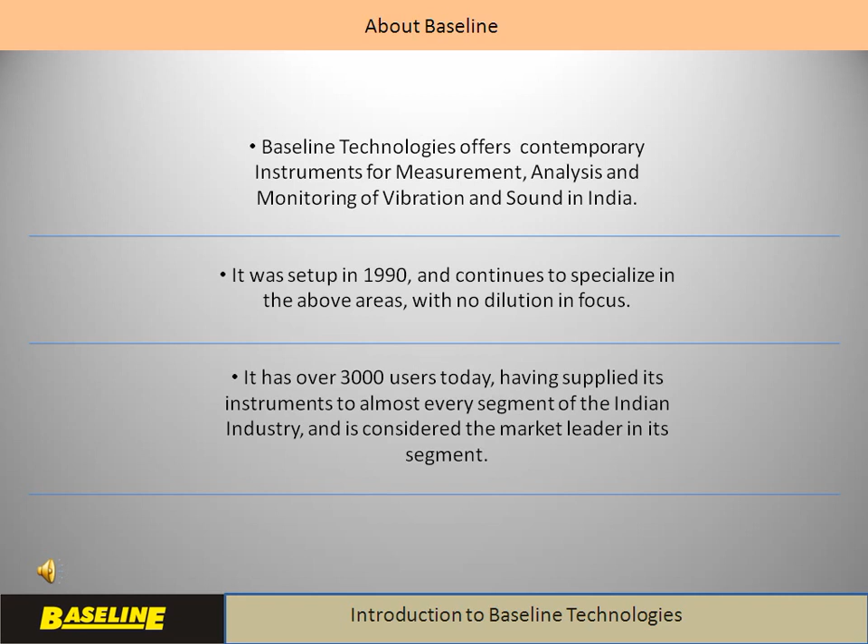Baseline Technologies has over 3,000 users today. It has supplied its instruments to almost every segment of the Indian industry, including the nuclear power sector, railways, and almost every leading engineering industry in the private sector. It is considered the market leader in its segment in India. These instruments have achieved industry leader status over the years due to their quality, dependability, ease of use, and continued application support offered by Baseline.

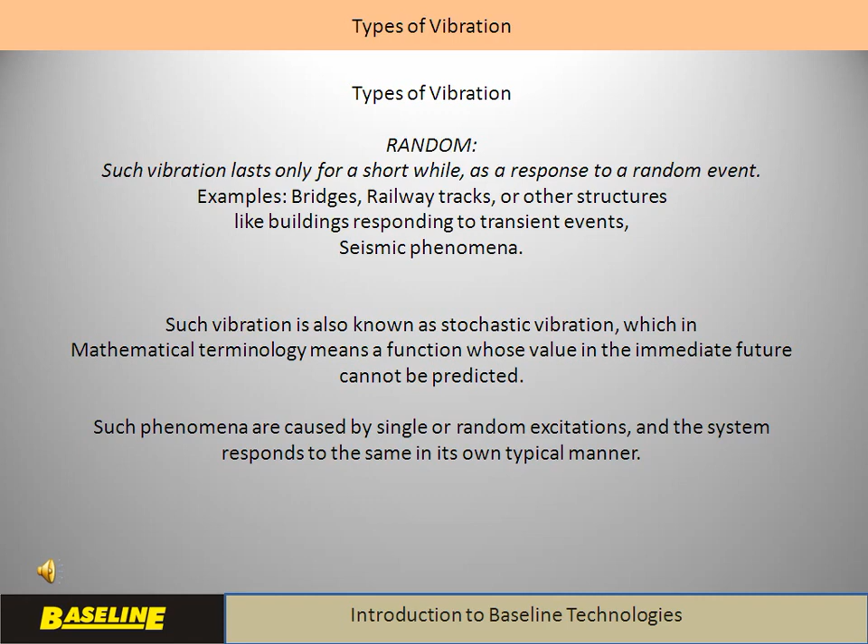Vibration is simply the to and fro movement of a body around its rest position. Vibration can be categorized into two major types: random and periodic. Random vibration lasts only for a short while as a response to a random event, for example bridges, railway tracks, and other structures like buildings responding to transient events and seismic phenomena. Here are some examples of random vibration, which is also sometimes referred to as stochastic vibration.

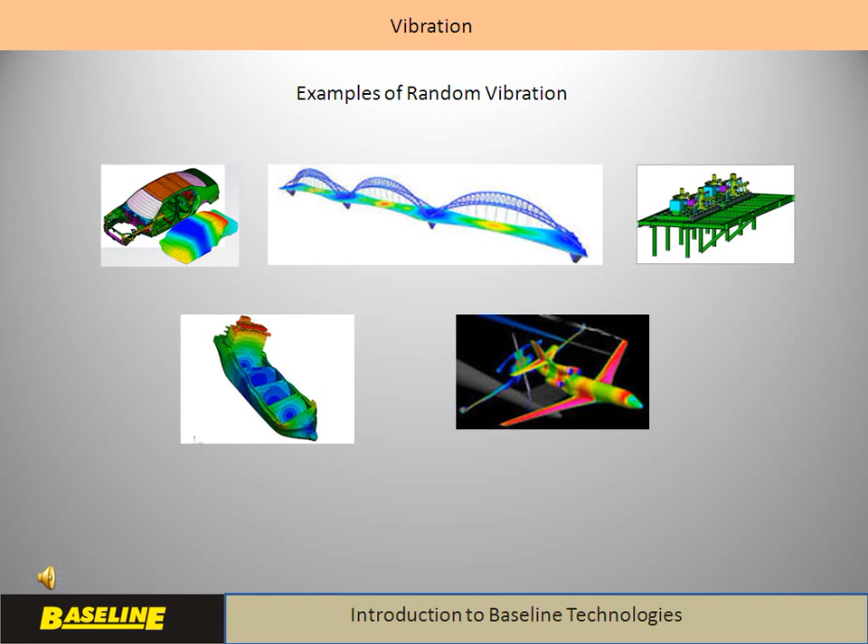Periodic vibration is a steady movement of the body around its mean position. It is a repetitive, predictable phenomenon and has a specific period over which it repeats itself. It is always a response to an alternating force, for example machinery vibrations and also structural vibrations caused by gensets or air conditioning plants, etc. Such vibration displays a periodic time function which follows well-defined mathematical rules, like a sine wave or the sum of many sine waves. It can thus be reasonably predicted. Thus, the concepts of frequency and its inverse, the time period, are associated with periodic vibrations.

Baseline offers equipment for assessment of the second type, that is, periodic vibration only. Here are some examples of machines which display periodic vibrations.

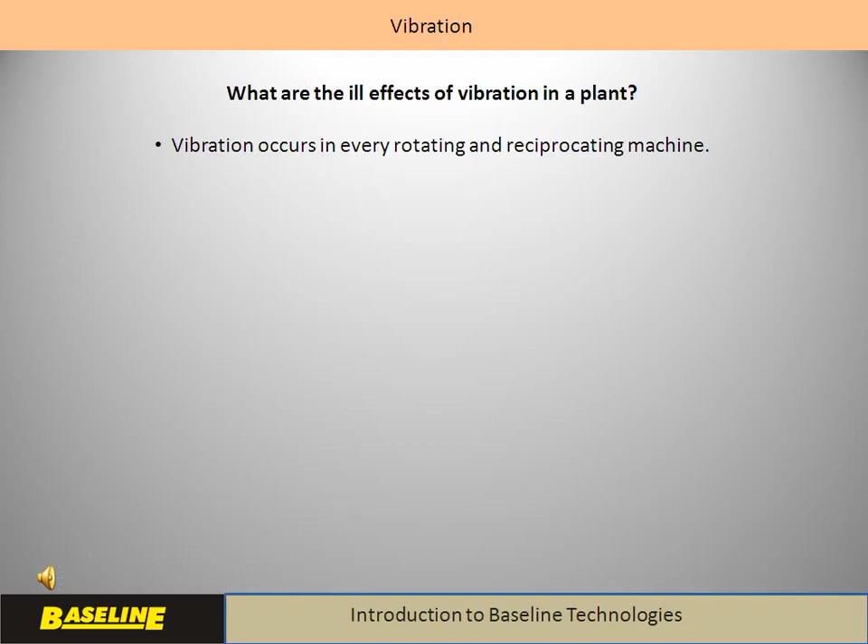Vibration occurs in every rotating or reciprocating machinery as a consequence of forces which are generated in such machines. These could be due to a variety of causes, such as rotor imbalance, misalignment, faulty bearings or gears, eddy currents, electromagnetic forces, etc. These forces act through the bearings to move the stationary parts of the machine.

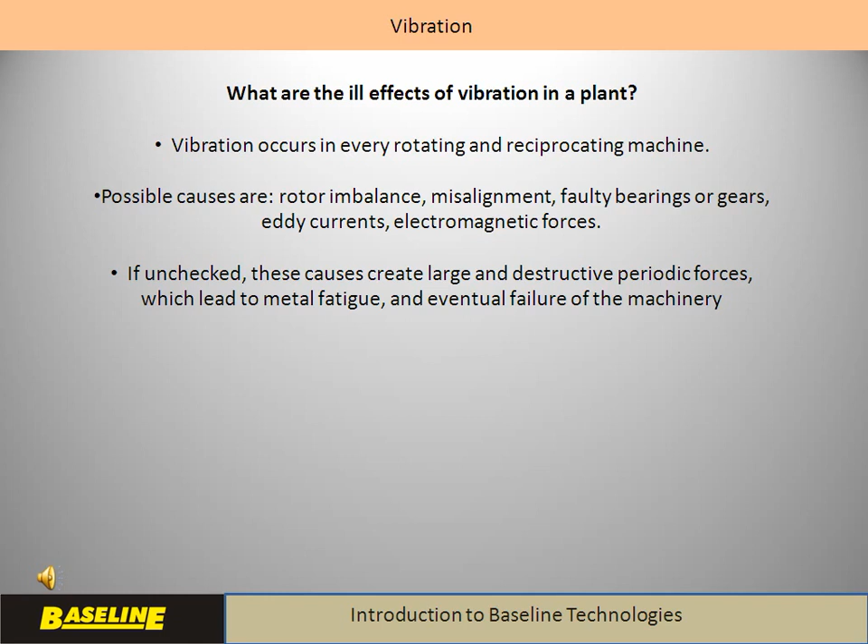If these forces are left unchecked, the following consequences are to be expected: metal fatigue leading to fracture, a lower bearing life, unexpected plant shutdowns, and energy wastage due to kinetic energy required for vibration. One of our customers confirmed having saved up to 18% of electric energy costs by implementing an effective plant-wide vibration control program. There is also operator fatigue and nuisance, which have occupational health consequences.

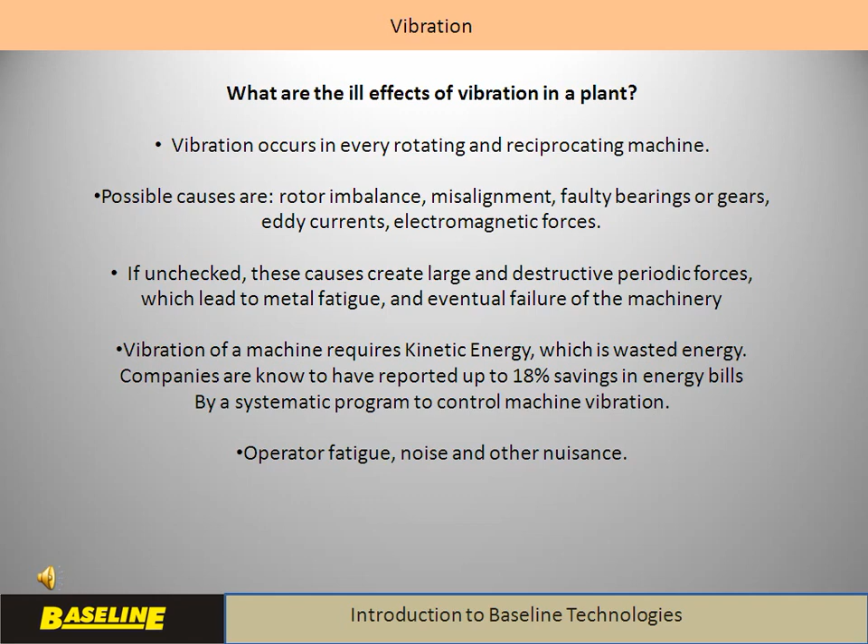Also, in some machines, it directly influences product quality, for example in grinding machines. Here is a real-life example: a cold rolling steel strip manufacturer was not able to achieve perfectly finished sheets. The problem was found to be the vibration on the grinding machine which was used to grind the rollers. This company managed to control the level of vibration on the roll grinding machine to extremely low levels. This resulted in an additional price of 25% due to higher quality classification based on the finish of the rolled sheets.

All vibration is the to and fro movement of a body around a mean or resting position. It can be measured in various ways. The amount of movement, or the magnitude, is known as displacement. It is the distance moved from one end to the other and is referred to as peak-to-peak displacement. The typical metric units of displacement are microns. Displacement emphasizes low-frequency vibrations; it used to be a popular method of measurement some 50 years ago. However, it does not convey the complete picture, since the energy of vibration is not only how much movement there is, but also how fast it is moving.

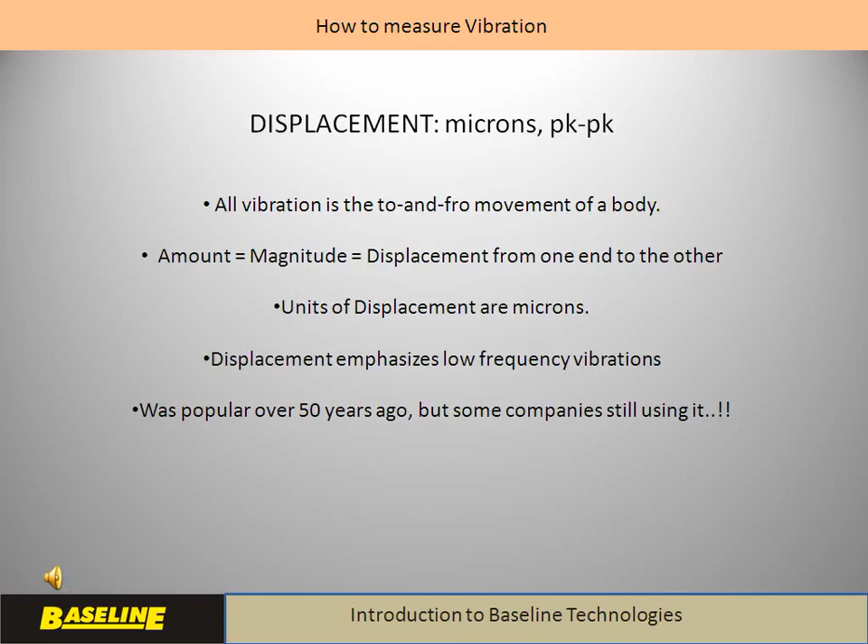The rate of change of displacement is velocity. It is the first differential of displacement with time. Therefore, velocity is the most commonly measured parameter as per modern standards. Velocity is the best representative of the energy of vibration, as it factors in both displacement and frequency. The metric units of velocity are millimeters per second. Velocity places even emphasis on low and high frequencies of vibration.

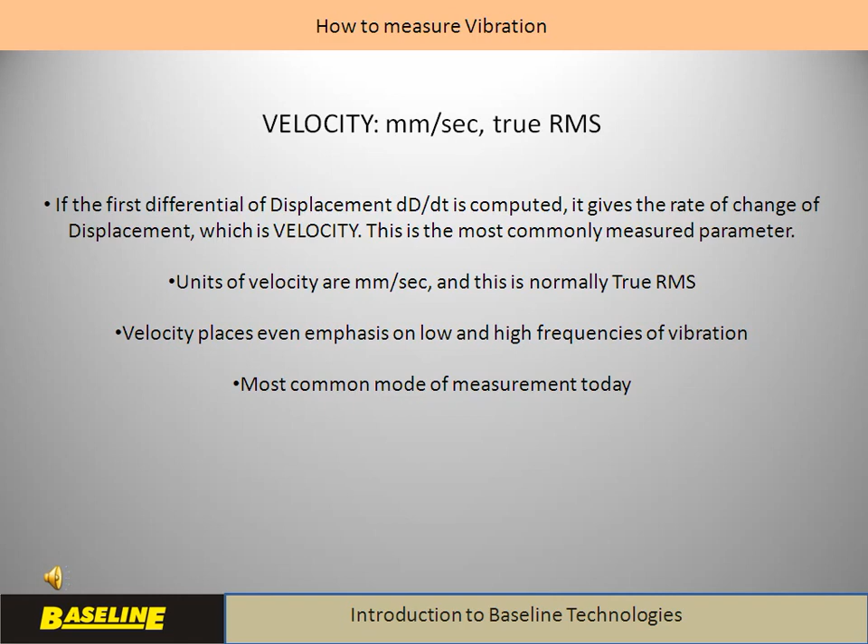The rate of change of velocity is acceleration. This is the second differential of displacement over time. The metric units of acceleration are meters per second squared. Sometimes this is also expressed in terms of the gravitational constant g, which is equal to 9.8 meters per second squared.

Acceleration emphasizes high frequencies and de-emphasizes low frequencies.

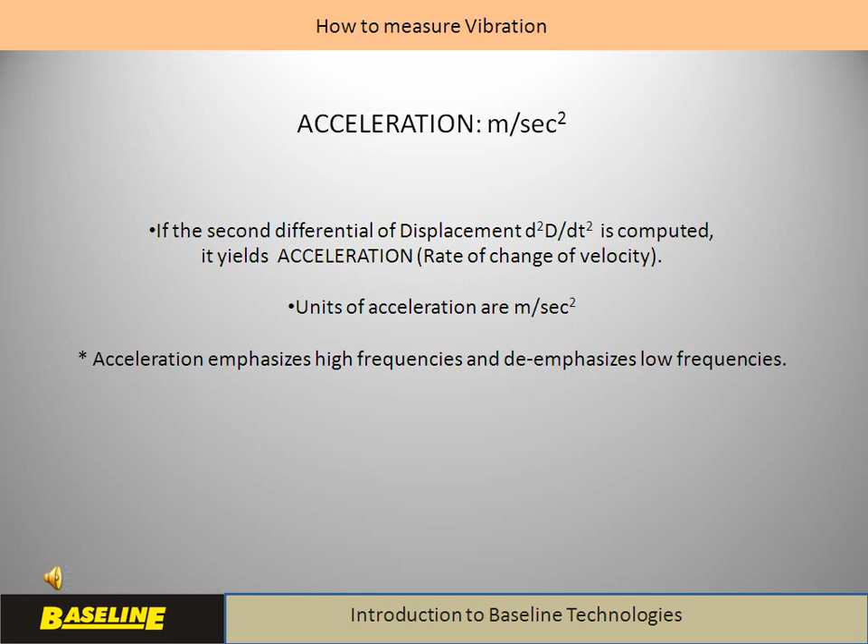Unless specific standards for a specific industry apply, the guidelines given in IS 11724 are a good guide for assessment of vibration severity on rotating and reciprocating machinery, which runs between 600 and 12,000 RPM. The standard is identical to the globally employed standard ISO 2372. In essence, the standard specifies how and what to measure and also classifies various types of machines into different categories depending upon their size and foundations.

It then lays down relative quality grades depending upon the measurement of vibration velocity. It also emphasizes the use of true root mean square velocity as the preferred parameter for severity assessment, as this is the only parameter which represents energy in the vibration correctly.

However, it does not mandate any acceptability criteria and leaves that to the discretion of the user. This is where the experience of the maintenance manager comes in. It is essential to periodically track the vibration severity, as measured by velocity in millimeters per second true RMS, at specified points on the machine. This provides valuable insights into whether a quality level B is good, or C is acceptable, for a given machine.

There can be several causes for vibration in a machine, and each cause has its own specific frequency. Thus, causes of vibration are identified through the understanding of frequencies present in a machine.

Based upon our experience, we find that imbalance is the number one cause for vibrations in rotating machinery. Whereas in most cases imbalance can be controlled by simple field balancing techniques, there are some cases where balancing does not seem to work very effectively. Such cases often pose a challenge to engineers and may require the services of outside experts, and yet sometimes the solutions can be amazingly simple.

Amongst other common causes are misalignment, faulty couplings, and vane pass. In pumps and blowers, the fluid going through pressure variations around a vane is often a source of eddies. This vibration can only be controlled by good design.

Faulty bearings are often the source of high-frequency vibrations in rotating machinery. Electrical motors may also exhibit vibrations due to an imbalanced or saturating stator field, which creates a distorted rotating field. Such vibration normally occurs at the electrical frequency or its odd harmonics. If the motor is also mechanically imbalanced, then the phenomenon of beats at the slip frequency is often observed.

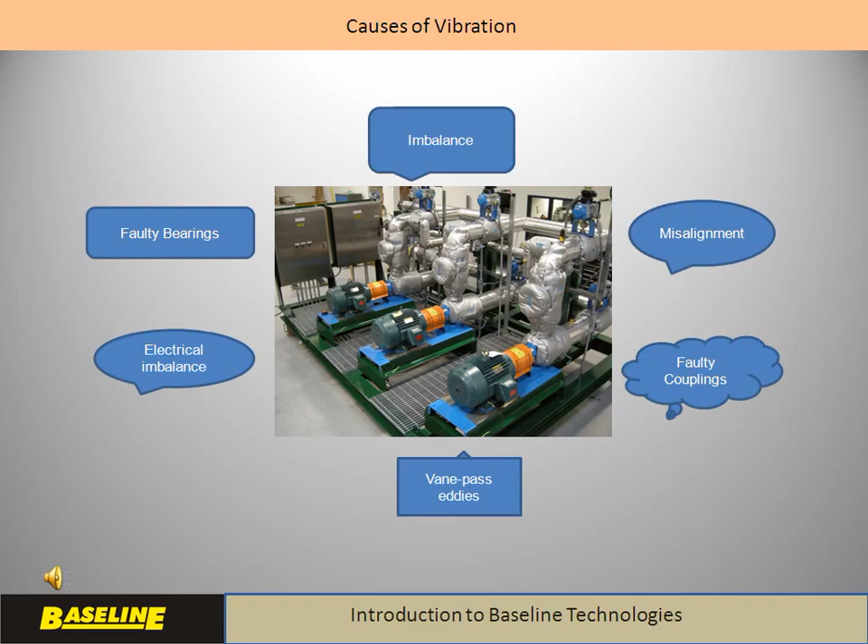A very simple form of monitoring vibration levels in machinery is to maintain a trend chart of vibration. In this chart, overall vibration velocity or bearing-related vibration levels are plotted over time, and the trend can help draw valuable conclusions regarding preventive maintenance.

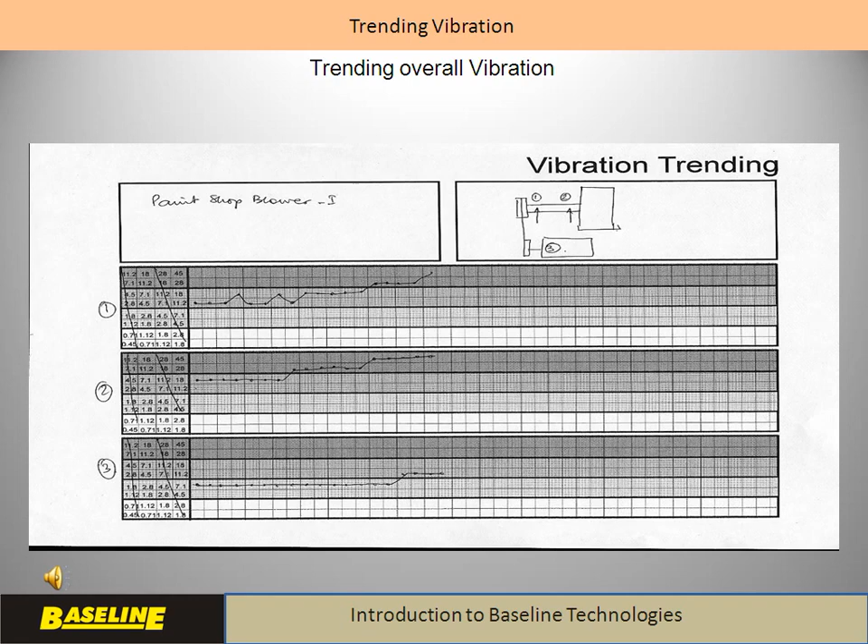In most cases, the technique of frequency analysis of vibration, also known as spectrum analysis, is essential to get to the root cause of the vibration. This technique is based on the fundamental concept that if there is a vibration at a certain frequency, its cause must also be at the same frequency. Thus, frequency information of the vibration is essential to fault finding.

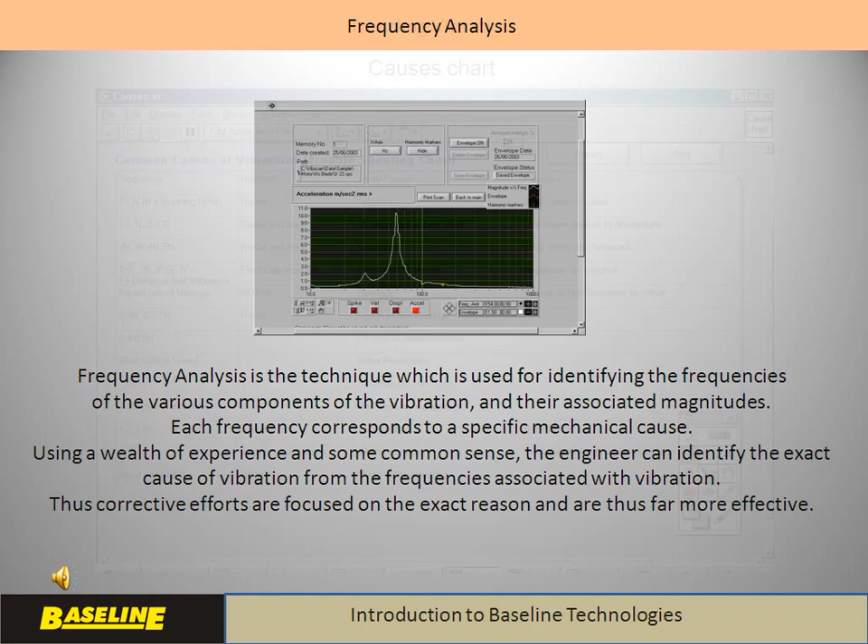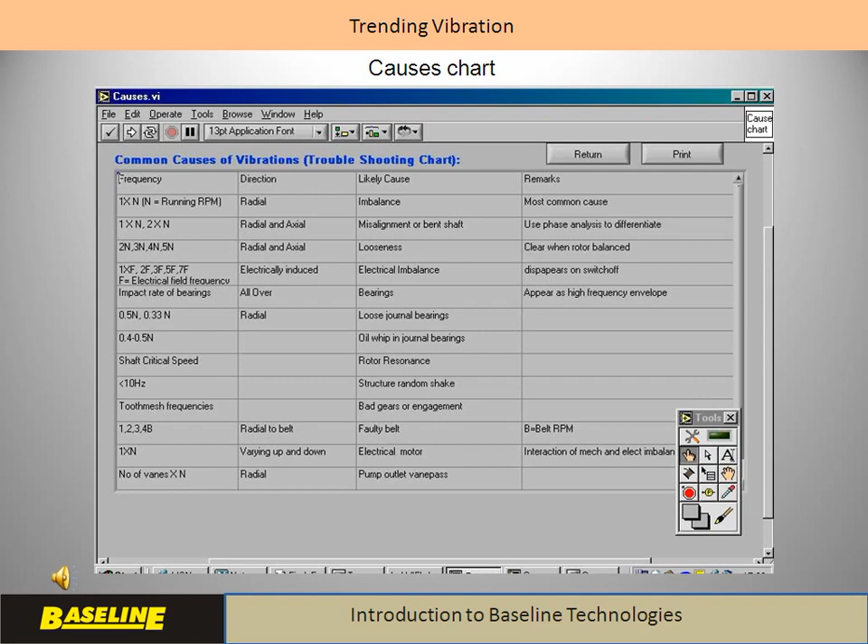A wealth of information exists on the internet and otherwise on interpreting the results of frequency analysis. Further, a system of periodic vibration assessment offers a powerful tool in the hands of a maintenance manager. A simple form of this is a systematic collection of vibration spectra at periodic intervals on specified points on critical machinery.

Techniques such as spectral enveloping and trending are invaluable for keeping a check on vibration and also in effectively preventing breakdowns in a plant.

Unbalance causes centrifugal forces in a machine. These forces create vibration at the rotational frequency. The principle of in situ balancing of rotors is based on this simple premise.

We measure the vibration as a vector, that is, amount and angle. The amount is proportional to the magnitude of unbalance, and the angle is proportional to its angular location on the rotor. A known unbalance is introduced and the system response is calibrated. The process then yields the correction mass to be added to counter the original unbalance.

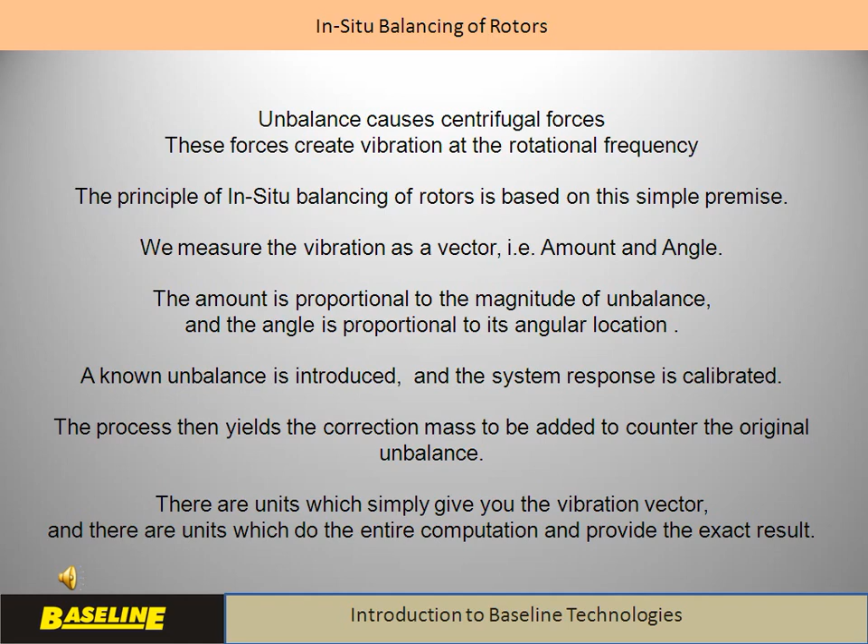Field balancing or in situ balancing is the process of balancing the rotor by running it in its native assembly with its own power. There are some field balancing instruments which simply give the vibration vector, and there are other instruments which do the entire computation and provide the exact result of where and how much mass is to be added to balance a rotor.

The benefits of vibration control and vibration-based condition monitoring are obvious, to say the least. Longer mechanical life of machines.

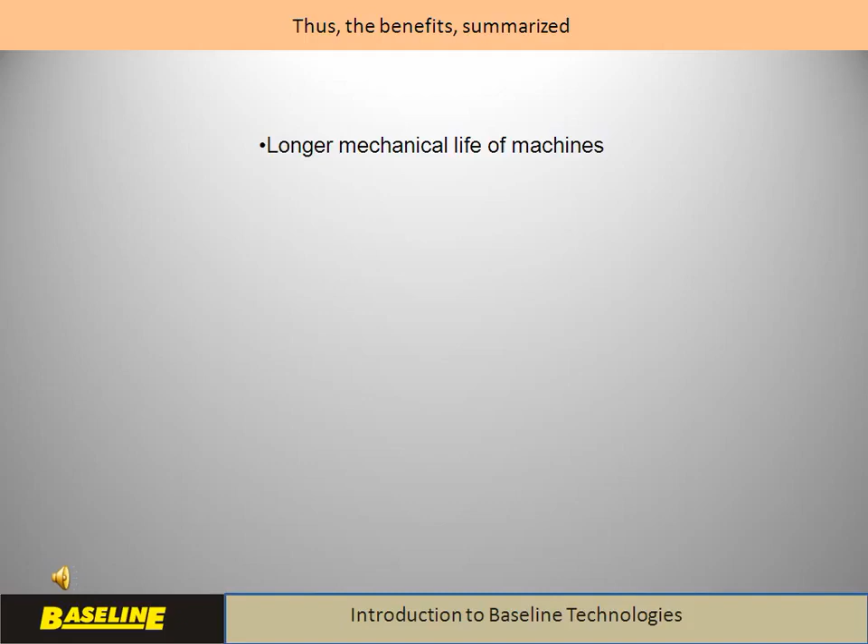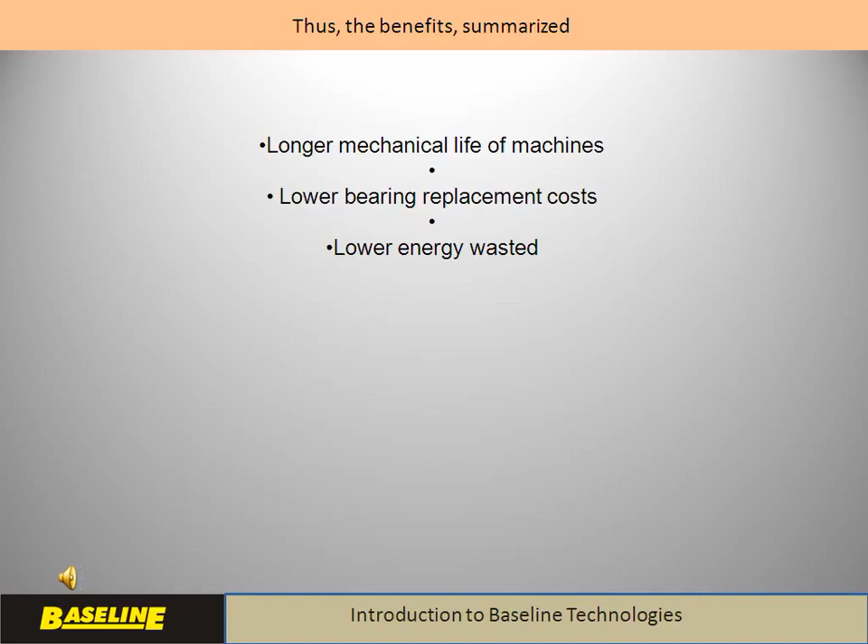Lower bearing replacement costs. Lower energy wasted. Better predictability of potential problems. Better quality of output. Quieter and less fatiguing environment. Reduction in unscheduled breakdowns.

The cost of instrumentation and development of in-house expertise is often recovered in one single breakdown prevented by these. Payoffs are often immediate. The long-term benefits are huge. This is the reason why most process plants find this to be an extremely rewarding investment.

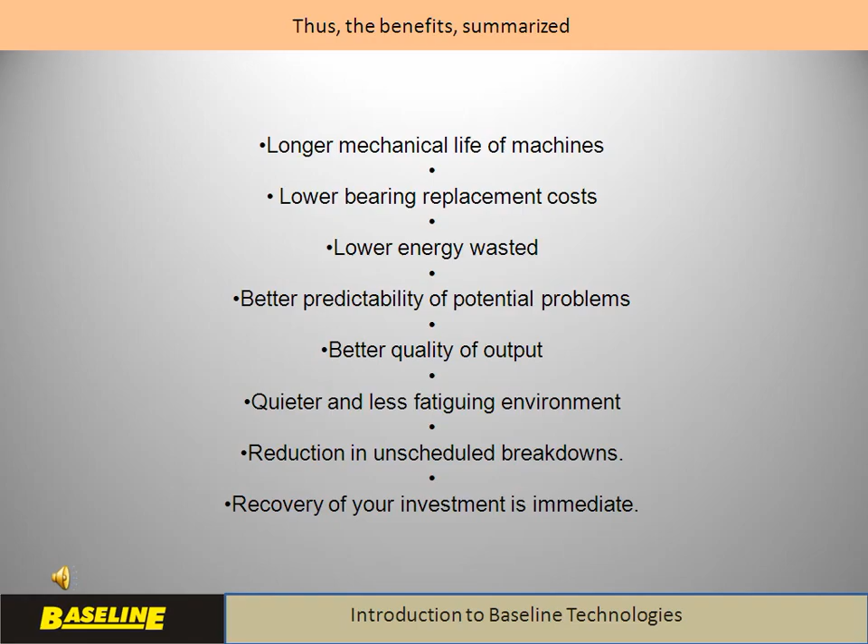Baseline offers instruments for measurement of vibration. There are two models of vibration meters, 2050 and 2040. Both are considered industry leaders in the segment and are in wide use across a range of industries.

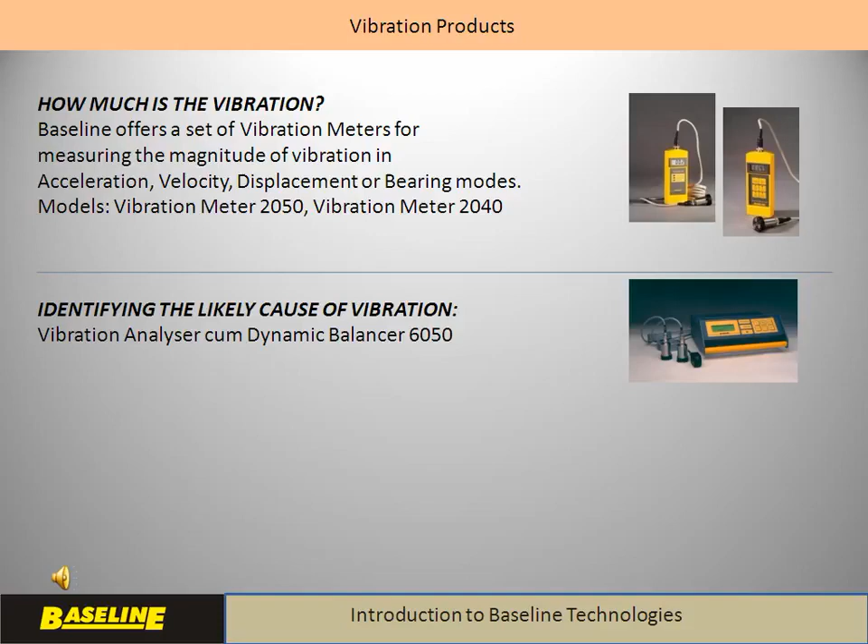For frequency analysis, we offer the Vibration Analyzer 6050, which also combines with it the software VS22 for the PC. With this instrument, one can set up a fairly sophisticated condition monitoring system in one's plant. It also provides the option of in situ balancing of rotors and continues to be one of the most preferred instruments by service providers.

There are three options available which provide in situ dynamic balancing function: the 1000D, the 6050, and the 5200. The portable balancer 1000D has been mandated by the Indian Railways for balancing of blowers on the electric locos. This unit operates on the conventional stroboscopic angle principle and does not offer any vector computations.

The 6050 offers vector computations also in addition to vibration analysis. The latest addition, the 5200, is a versatile balancer with many options of balancing and is a professional's dream. With its advanced digital signal processing, it offers unmatched precision and an optional printer to document the process.